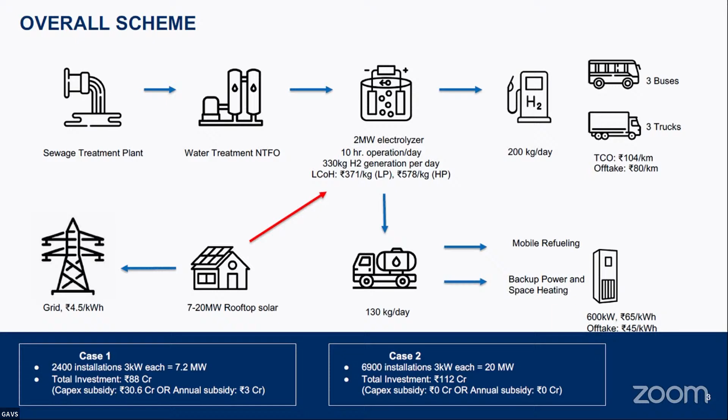So obviously the prices are a little high because of the nascency of the technology. However, even if there is a gap between the conventional cost and the cost from such kind of project, it would be paid through a subsidy. So for a capacity of 7 megawatt, a subsidy of 30 crore was required in terms of capex subsidy. But if you extend this to the entire Leh potential of having 6,900 households, then there won't be any subsidy required.

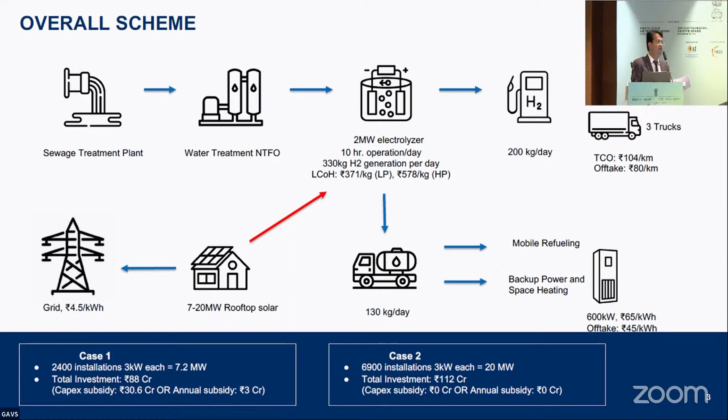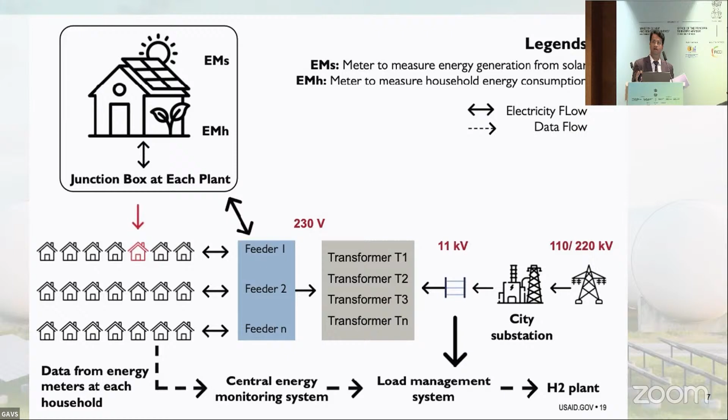So this model that we have created is to replicate in different cities. That would not only cater to the rooftop target of the country, but also take this project as a green hydrogen generation project for different cities and different users. You can see there are different households where we can have rooftop solar, and this rooftop solar can be centrally aggregated, and through a net metering agreement, we can actually generate hydrogen.

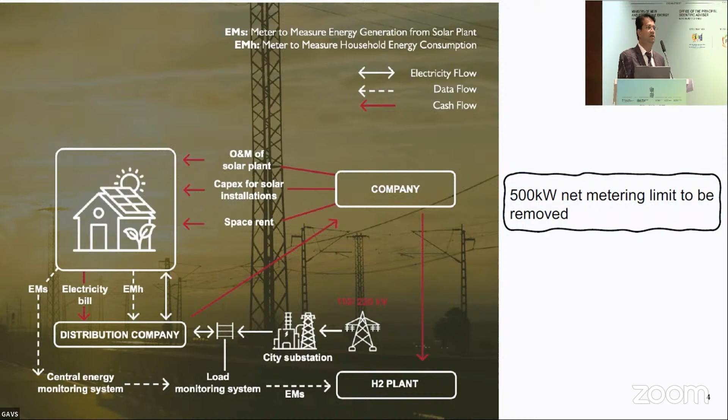And definitely for the cash flow, we would be paying the roof rent to the roof lenders, and we'll be getting money from the DISCOM in terms of excess generation that we have. And then the hydrogen that we produce can be utilized in buses and trucks, and also for backup power in the niche segment of hotels. So here we have also estimated what will be the cost, what will be the subsidy required, and if you want a graded subsidy, what rooftop targets we can take every year.

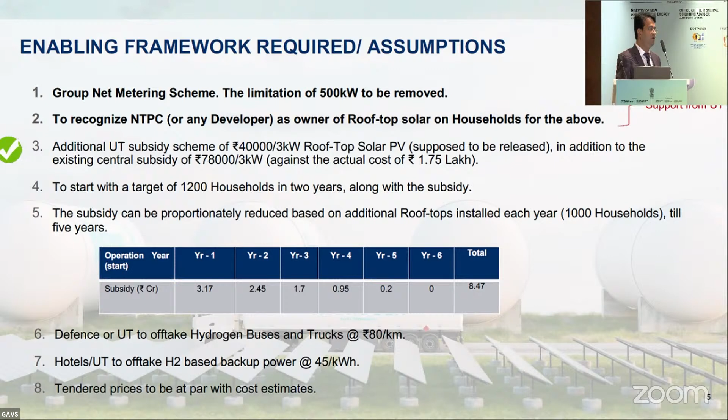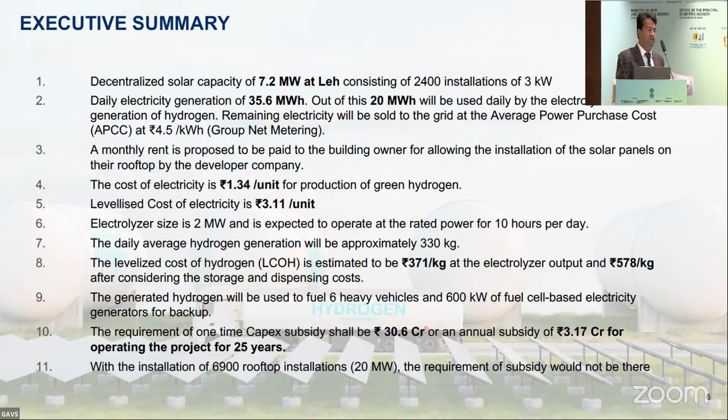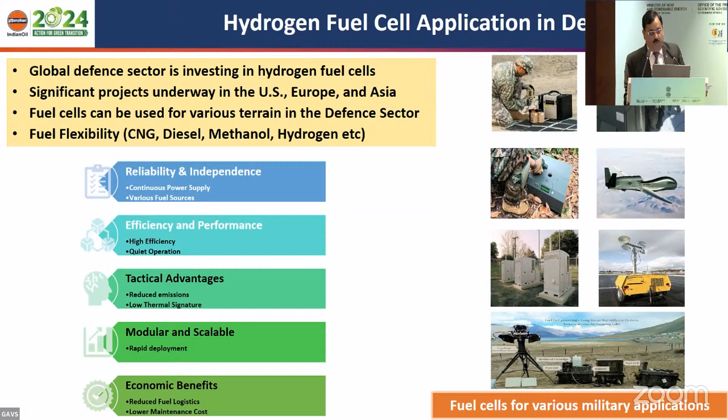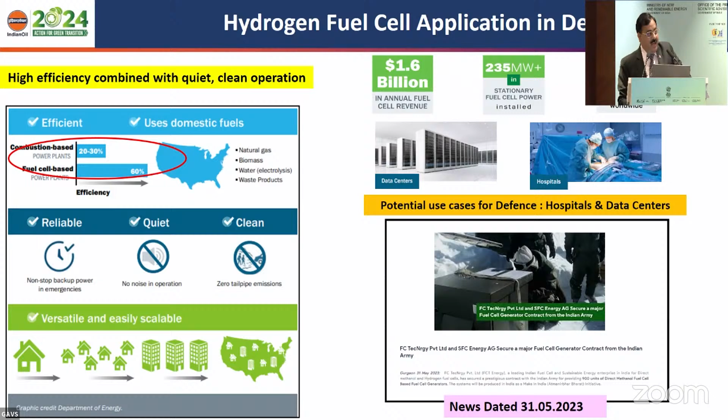Other applications, as I told you: reliability and independence, then efficiency and performance, and there are advantages like you can store energy, modular and scalable. So these are the benefits which I will say fuel cell and hydrogen have over battery applications. A lot of countries have already taken initiatives, and their defense forces are using hydrogen-based fuel cells for various applications.

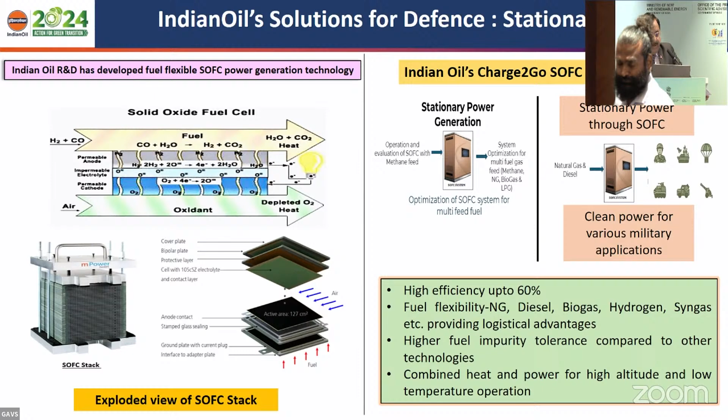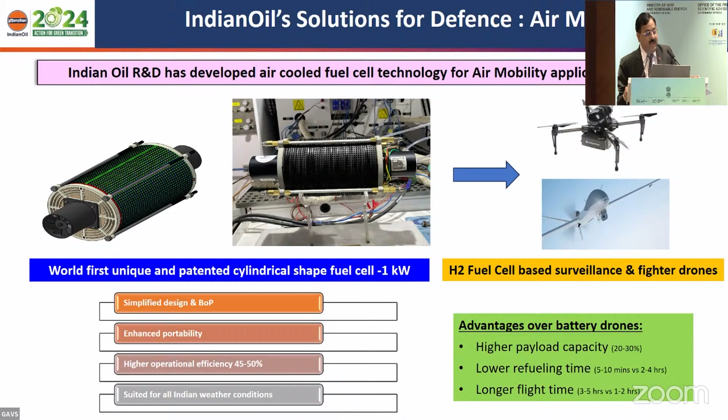At Indian Oil, we are also trying to develop the fuel cell for stationary application as well as mobility. We are trying to develop our own, because the buses I showed you are all imported. But now we are going for the development of the indigenous fuel cell. I think you will hear from other panelists also what they are doing in this sector. So this is a special fuel cell which we have developed for the mobility application. This is now patented. We have developed it at 1 kilowatt, and now we are going for the scale up.

We are also trying to develop a hydrogen based cooking solution, along with the hydrogen generator, for the defense application. So these are some of the projects. And just as a summary, I think we are trying to target all mobility, stationary, even air mobility, not right now, but slowly we will be coming into that also, and cooking applications.

So these are some of the initiatives which we have taken, and I think Indian Oil feels proud in partnering with the defense forces. So this is all from my side. I think we'll hear from the others, and then we'll go to the panel discussion. Thank you very much.

Thank you so much, Mr. Sharma, for setting the context for the day. And now, ladies and gentlemen, it's time to welcome our panelists who are going to present their work in brief, how hydrogen is undertaken in defense.

Our next speaker, ladies and gentlemen, holds a PhD in mechanical engineering from IISc Bangalore. He has been with Ashok Leyland for the past 20 years and has worked in engine research and development in the areas of diesel engine design, simulation, combustion development, performance and emission testing, as well as overall project management. He is involved in creating an alternate powertrain roadmap for future engine technology, which includes hydrogen and methanol economy. Please put your hands together and help me welcome Mr. S.K. Pandey, DGM-Engine Research and Development, Ashok Leyland. Very warm welcome, sir.

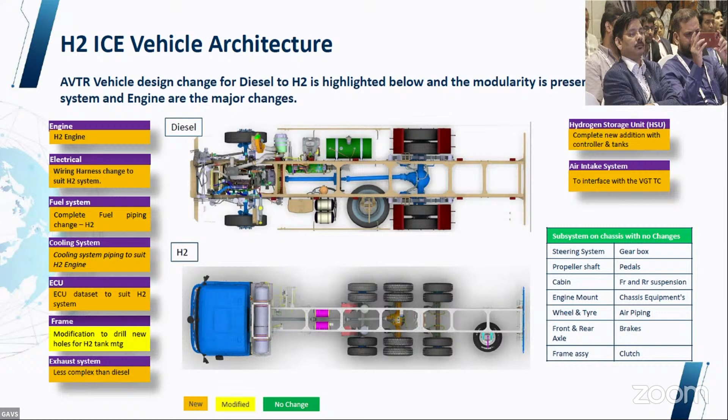So that's, in a sense, the architecture of the vehicle, which is not very different from what we have for diesel or a CNG architecture. So it's something which is actually doable with minimal changes.

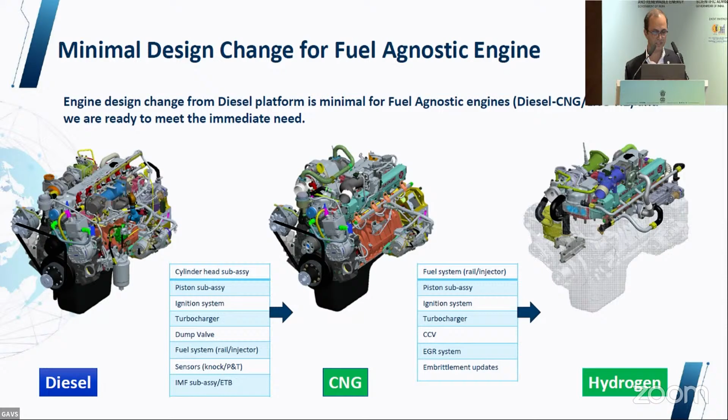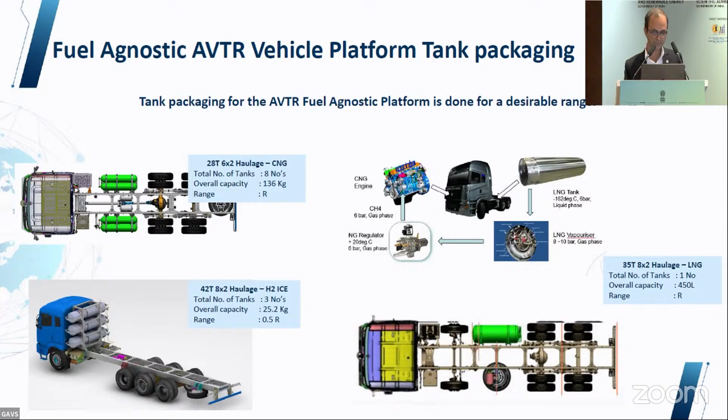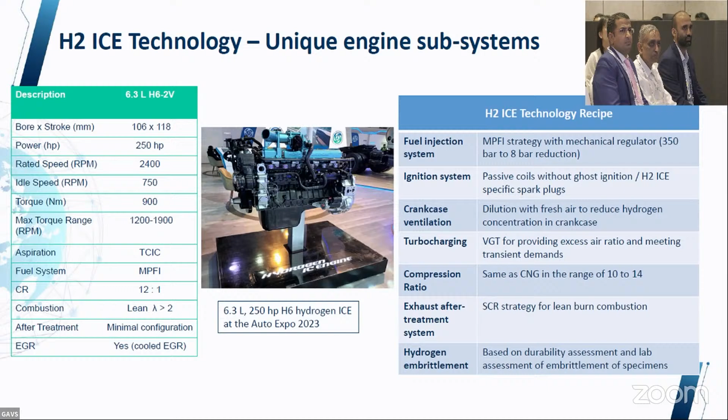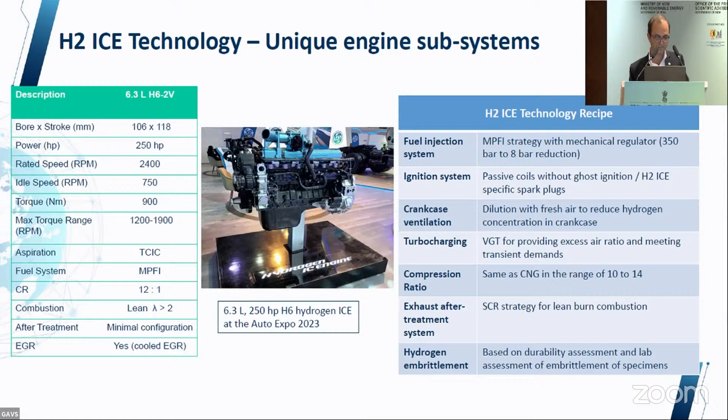The recipe is mentioned on the right-hand side on the table. Each of these unique subsystems, right from the fuel injection system, which is an MPFI strategy: we regulate 350 bar tank storage pressure down to 8 bar and use it in the rail. Ignition system, a passive coil without ghost ignition, that's very specific to hydrogen combustion. Crankcase ventilation requires dilution along with recirculation. Turbocharging is very specific to hydrogen and needs to be tailor-made for hydrogen. Compression ratios are something like CNG. We spoke about the after-treatment system, and there need to be hydrogen embrittlement updates too.

This is our journey in brief. We started with design a couple of years before. We are right now at a stage where we are working on detailed calibration and also starting the validation. Very shortly, we would actually start launching vehicles into the market.

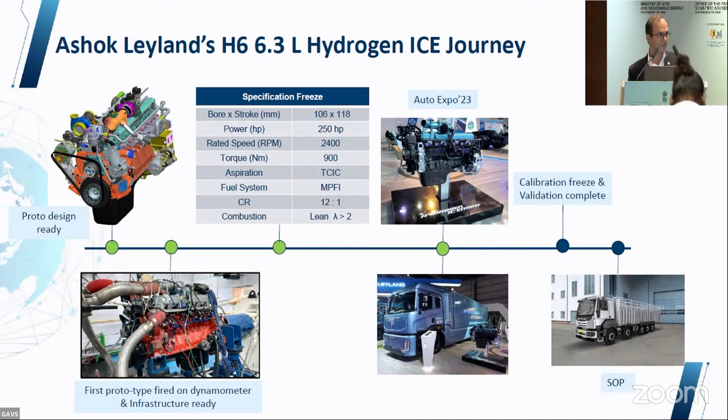This slide, most of you would be familiar. We have partnered with Reliance, and right now 23 vehicles with H2-ICE are running. They have gathered a lot of mileage, and in fact, one of them is being showcased in the expo as well. On the right-hand side is our flagship 42-ton haulage that we are working on right now. But it could be anything between 19 tons to 42 tons that this engine can cater to.

Very specific to this theme now, the H2-ICE for defense. So there are 4 different categories: armored vehicles, high mobility vehicles, specialist vehicles, and logistic vehicles. We see a clear visibility to get into the logistic vehicles with this class of engine. If we need to go to the armored vehicles, we would actually have to go to something like 320 horsepower. So that's doable. We have a roadmap that may take another 2 to 3 years of time frame.

The challenge in defense would be clearly altitude capability, because the moment you take the turbocharger matching to an altitude, it actually derates. So the altitude capability would be one thing which is very critical, and also the cold starting issues due to water content in H2-ICE would have to be addressed. So these are some solutions that are available, and we're working on that. So this is what I had to present.

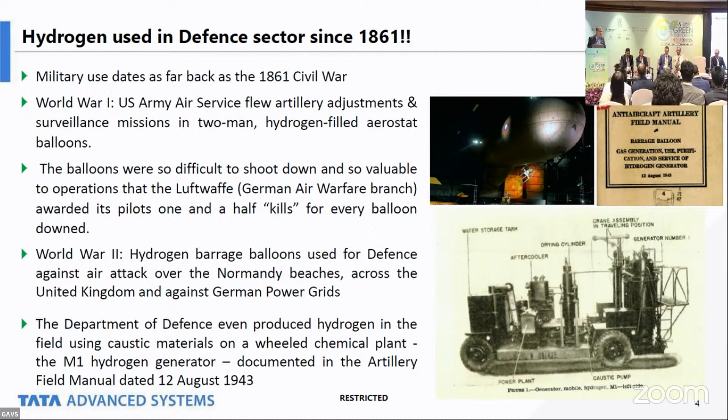UAVs have an endurance limitation using batteries. Our fuel cells are offering at least 3 times higher endurance as compared to a similar payload. Ground vehicles, what Mr. Pandey mentioned, there are a number of trucks, artillery vehicles, they all use auxiliary power units, which are basically diesel generators for generating the power. That's one area where fuel cells have been successfully tried.

A number of forward posts in the army, field hospitals, they all depend totally on diesel generators, 5 kilowatt, 10 kilowatt. Again, one of the highest segments of potential in the defense sector. We develop a lot of weapon systems, including artillery guns, launchers and all. All of them require a very important mode called a silent firing mode, where you want to make sure that the main engine is not running and you're not detected.

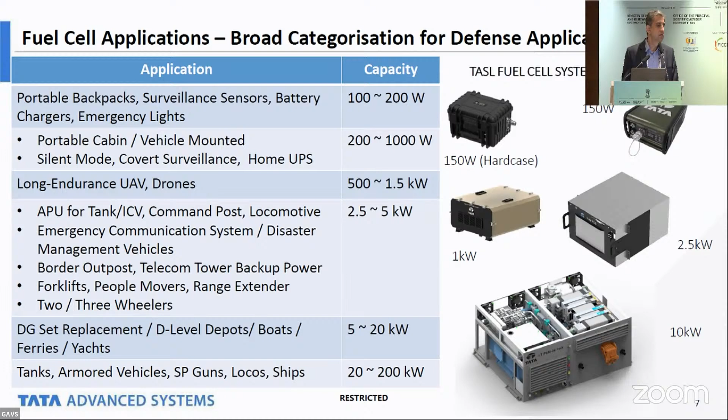And of course, the military mobility, where there are a number of vehicles using ICE engines, trucks, 4x4 trucks, armored tanks, which have a potential for the fuel cell system. Same thing if I just categorize in terms of power from top to bottom, starting at 100 to 200 watt, going up to 200 kilowatt per, say, any ICE engine or even a bus, what IOCL has supplied to the army.

All over the world, the other armies have invested heavily in hydrogen fuel cells. US has invested 62 million in hydrogen refueling infrastructure. Korean army has about 800 trucks, 800 armored vehicles, which are all using ICE, and they have already collaborated with Hyundai and Kia, and they are developing hydrogen engines for these platforms.

Another important contract which US awarded recently was $10 million for conformal hydrogen storage. As we know, right now, hydrogen storage is all in cylindrical way. But for UAVs and other platforms, you need them to be in a shape that is more optimal. So a special contract for 10 million was awarded to make such storage conformal, in the shape of the platform itself.

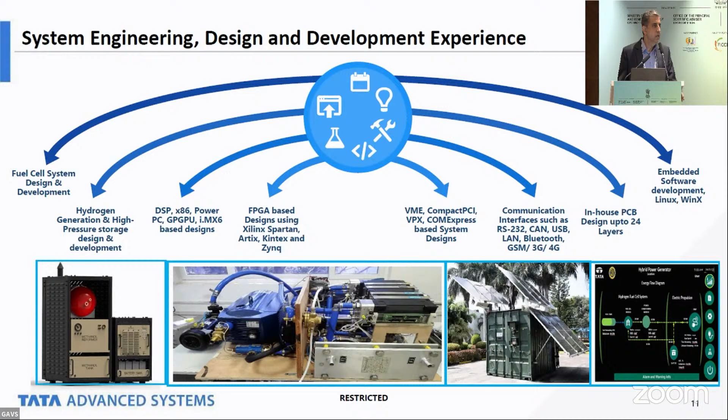A little description about what Tata has been doing for the last 8 to 10 years. For the last 40 years, Tata has been supplying weapon systems and tactical communication devices to the defense forces. Our DNA being R&D, we decided to start by developing the fuel cell systems indigenously in-house. So as you can see, right from the balance of plant, the PCB design, the complicated stack control strategy, the GUI, communication interfaces, the rugged packaging, everything. Today, we are not making the stack. I'll tell you the reasons for that also. But other than the stack, everything is made in-house by Tata Advanced Systems.

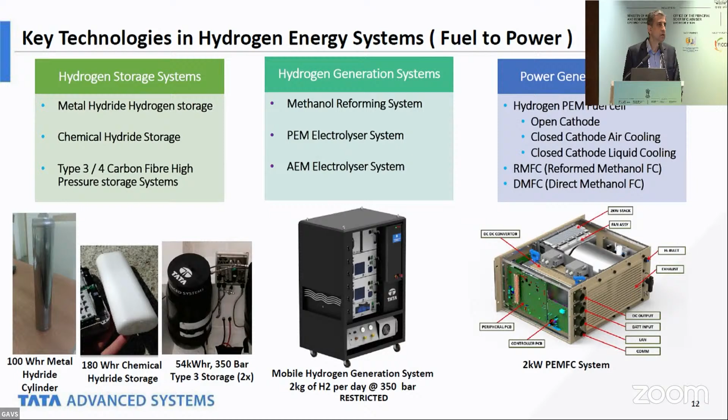So we started our journey. Our capabilities started with metal hydride, chemical hydride, and now with compressed hydrogen. We are developing a small compact hydrogen generator, which is about 2 kg of hydrogen per day. And on the fuel cell side, we have capabilities with open cathode, closed cathode air cooling, closed cathode liquid cooling. I'll show you the products which we have developed indigenously in the next slide.

These are some of the products, and for the defense sector, there is an important compliance requirement that they must be JSS 55555 compliant. They are very strict compliances in terms of temperature, shock, high altitude. Temperature is one of the most strict things where we have to ensure that the system works from minus 30 degrees to plus 55 degrees. And it has to start at that temperature.

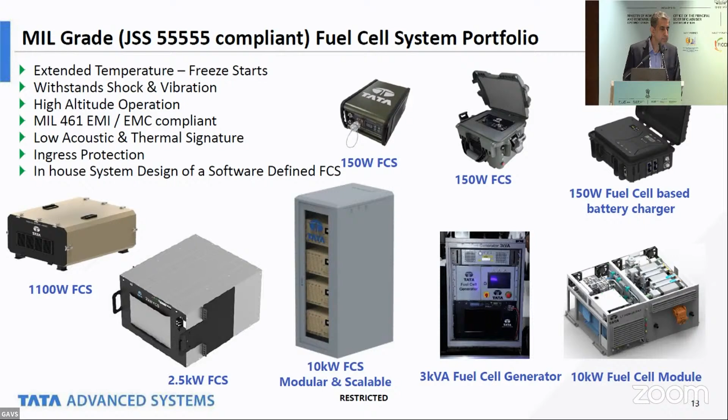So one typical test they do is they actually soak your system for 16 hours at minus 30 degrees and then tell you to switch it on, which is one of the toughest tests to perform on a fuel cell system. And the high altitude operation, which my colleague already mentioned. In UAVs, we have products which can demonstrate 3 times the endurance of a conventional LiPo battery for the same weight.

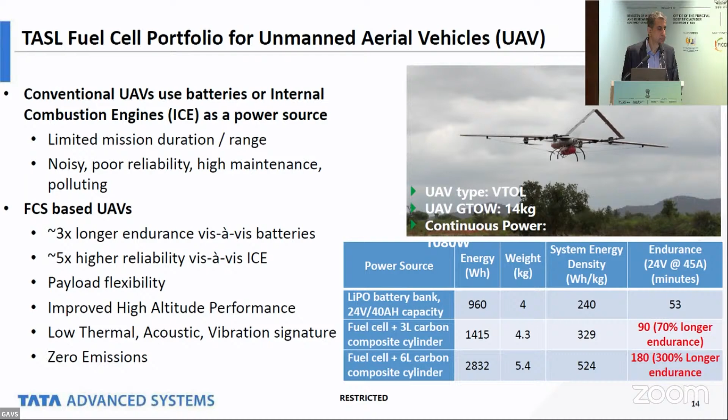And recently, we have become a technology partner for Mazagon Docks Limited, where a fuel cell ferry was launched. The fuel cell was again indigenously developed by our company, and it was launched by the DefSec in May 24. Compared to an equivalent electric ferry, which gives about 5 hours of endurance, our fuel cell gives 17 hours. And the filling time is just a few minutes as compared to almost 10 to 12 hours, which you have to charge a battery.

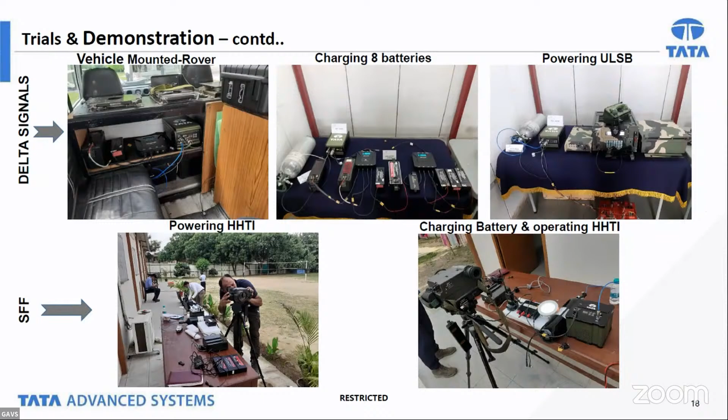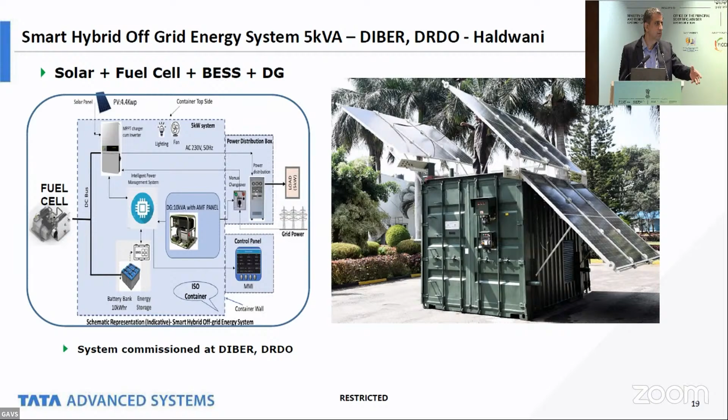We are among the first few companies who actually trialed a hydrogen fuel cell at 18,000 feet. So I'll move forward. So these are some of the pictures. We trialed them at 18,000, 6,000 and all. Again, some more pictures of our trials conducted. This system we recently commissioned at DRDO. It's a standalone microgrid using a fuel cell, solar, DG and a battery and an intelligent power management controller, which we have developed in-house. So we have proved beyond doubt that hydrogen fuel cell is the way to go for defense.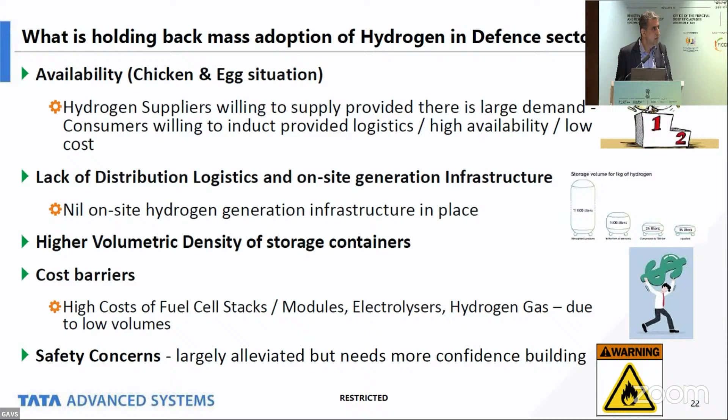Challenges faced. There is a chicken and egg situation. You know, there are 200 hydrogen suppliers and distributors all over India. They say, you show us the demand, we'll reach the hydrogen. The army says, you show us the hydrogen, we'll give you this. So we need to all come together and address that. Today on site, there is no on-site generation. NTPC has initiated the first one. Volumetric densities of cylinders is a little challenge, costs and safety. Most of them we have alleviated.

So these are some of our recommendations: we need a strong partnership between the stakeholders, that's the MOD, MNRE and the industry. IDDM and DCPP are important, that stands for Indigenous Design, Developed and Manufactured in India, and Development cum Production Partner. All of us will agree that we have spent a lot of investment in designing these products, and we need a similar commitment from the MOD for production orders. Today, we are willing to spend a lot of money to invest in a stack development or a fuel cell development, but we need those commitments in terms of volumes.

In terms of infrastructure, our recommendation is to first have hydrogen as a service. Install these tube trailers, cascades, and trailers at the site. In parallel, we develop the captive plant model, and the ultimate goal should be piped hydrogen to the forward. Thank you so much.

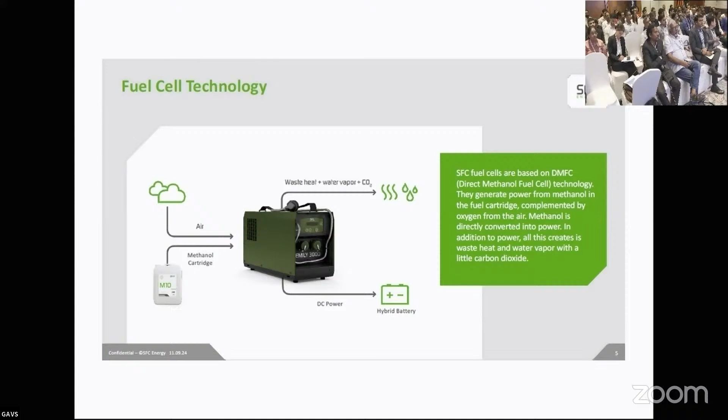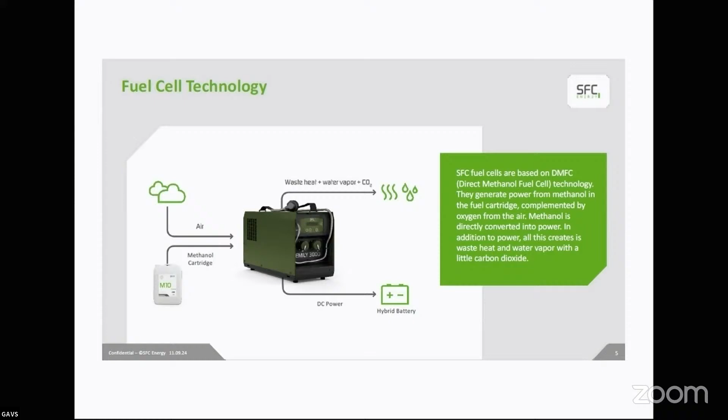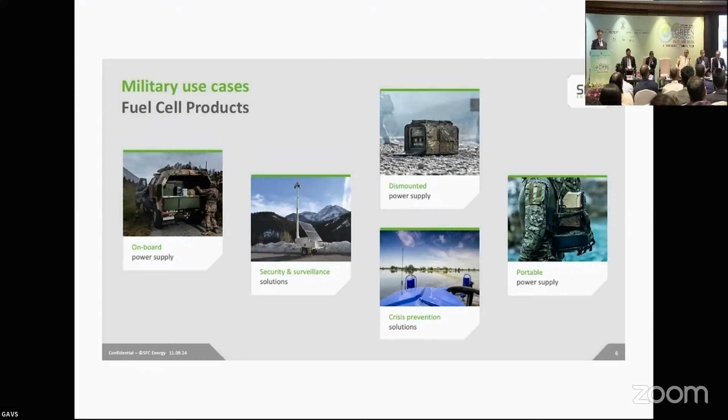What is also important to mention is a fuel cell generates DC power instead of AC that a generator usually does. And that allows us to hybridize seamlessly with batteries. And that has a huge effect on the overall efficiency that I'm going to point out in one of the following slides. Here you see the military use cases, also very similar to what we have seen before, from portable to onboard power supply to crisis prevention and also dismounted scenarios. I picked out two examples that I'm going into more detail. One is the crisis prevention and also the dismounted and camp size applications.

This here is an example where we did a study together with the Spanish Foreign Legion right before the COVID crisis happened, 2019. And this is a one-on-one comparison in a military camp. On the one side, using the generator that you see on the right side of the slide, a conventional generator far away from the camp because it's loud. The soldiers in this experiment were sleeping in the tents overnight over 3 days. And then you see the fuel cell being deployed next to the tent, a methanol fuel cell in this case with a hybridized battery bank.

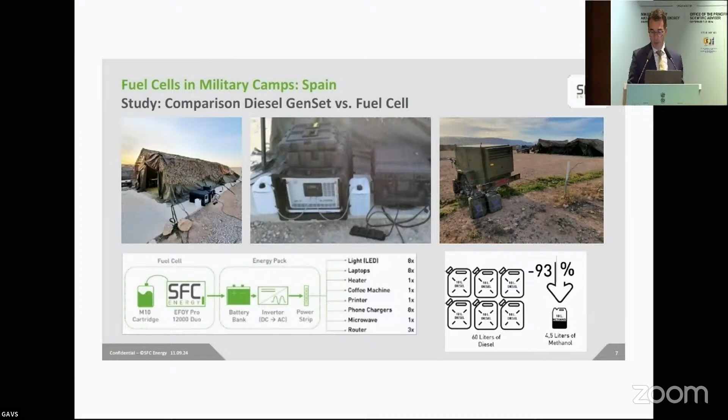And the key outcome of that study, this is really remarkable, is we used 60 liters of diesel on the conventional side and only 4.5 liters of methanol for the campsite using the fuel cell. And you see the applications that are in here. You have light, laptops, a heater, a coffee machine, a printer. So this is what you find in these tents. And that shows you the capabilities of fuel cells being used in the military environment. So it's a huge saving potential. And that also drives the efforts of the various armies around the world to replace diesel generators by modern fuel cell products and systems.

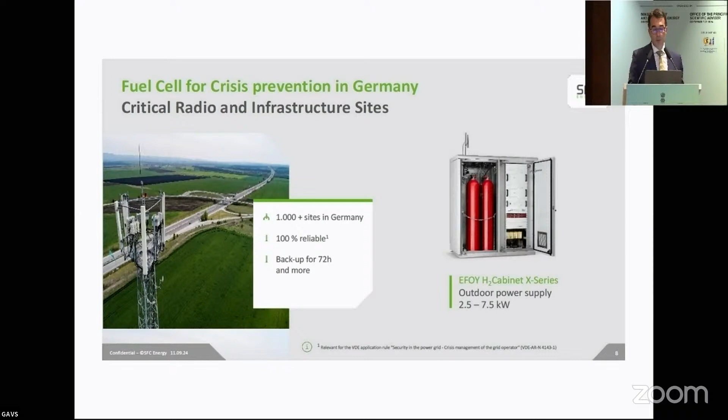The second one I'd like to point out is in Germany, crisis prevention. Germany is facing a lot of flooding, unfortunately, also due to global climate change. And the digital network of police, fire brigade, rescue services has a backup power from fuel cells. Over 1,000 of these sites have already been deployed. There are SFC products inside, as you can see on the cabinet on the right side, and it gives you reliability of uptime if the power breaks down nationwide for 72 hours, to allow rescue teams to do their job and to communicate, which is key in these situations. So these are examples where fuel cells are today used in significant amounts very successfully.

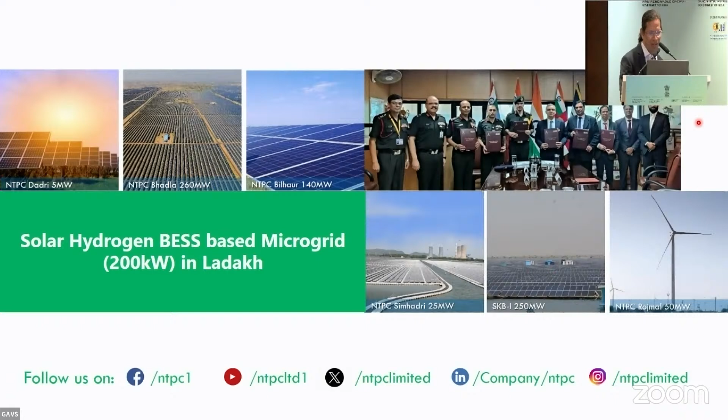Dear all, see this pic. Now I'm very excited to share with you all what we are trying to do with defense. Now this agreement was raised between NTPC and defense just to explore what is that we can do. Now NTPC is known for electricity and defense is known for what they do best. Now what best we can do? We came out with few proposals which I'll be detailing.

Essentially, what we're trying to do is to supply 200 kilowatt round the clock, day and night, without using any conventional source of energy. That's the scheme. And why it is required? Because army personnel are working at such a great height, high elevation, no grid, difficult to take diesel or kerosene or petrol to that location regularly. And coupled with that, the requirement of noiseless operation.

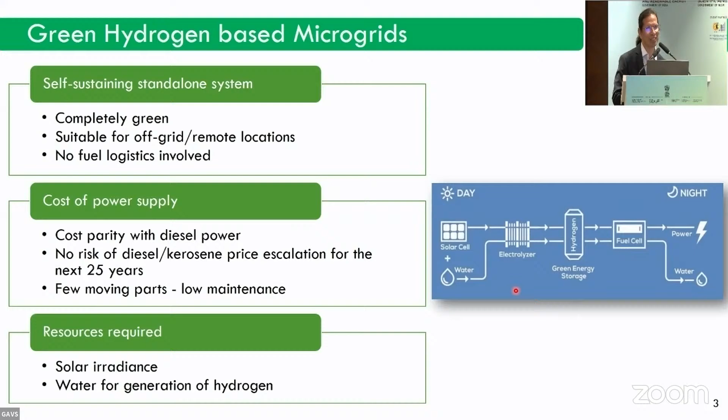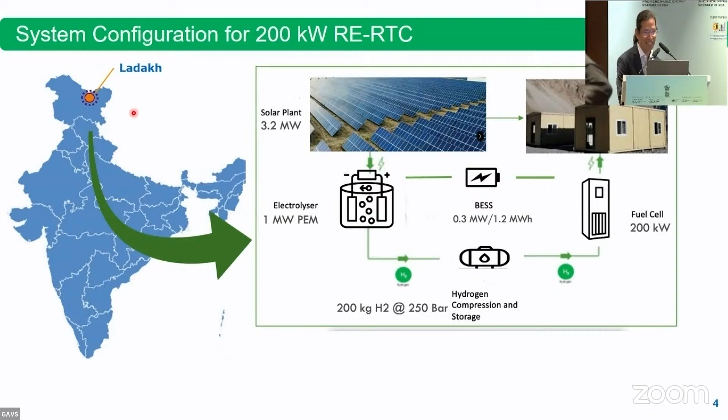Now, this is slightly difficult picture. Just see here. Now, essentially, what is showing here, that is the electrolyzer, there is a battery, and there is a fuel cell. Fortunately for us, when electrolyzer runs to make hydrogen, the other two components are not working. When the fuel cell is working in the night time, non-solar time, other systems are not working. Yet, I need to keep all of them at an elevated temperature so that whenever I need them, they are ready to fire. So that waste heat from the electrolyzer heats the other two during the daytime. During the night time, the waste heat from the fuel cell, which is quite high, heats up the other two, so that all are maintained at an elevated temperature all the time. That's the beauty of the system.

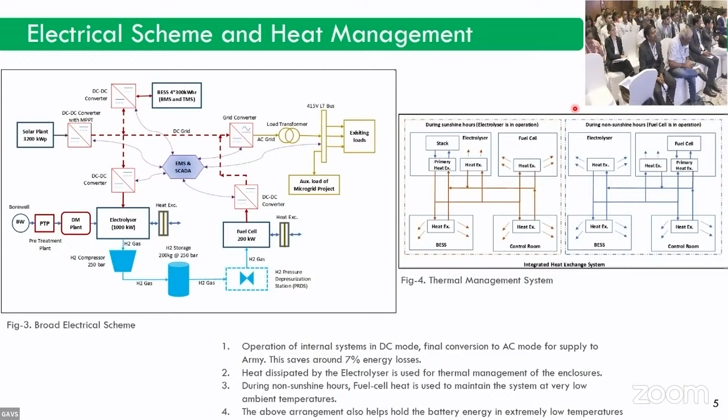And like previous speakers pointed out, the fuel cell gives direct current output, and so also the solar module. So just to save energy, we have some solution here. Essentially, for electrolyzer operation, we are taking the direct current from the solar modules so that we save energy on that.

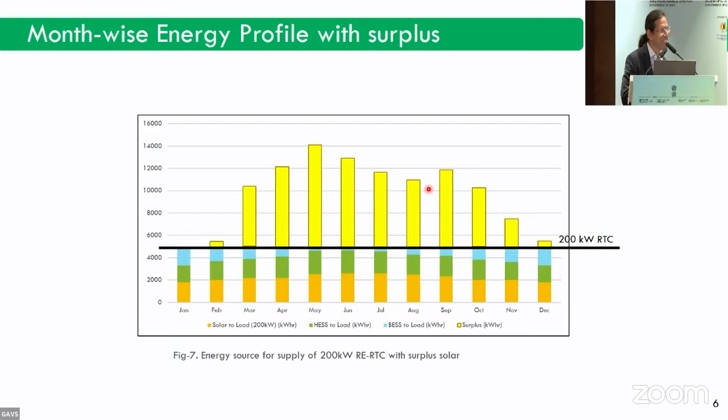Now, this is my last slide. You can imagine, simple to see and enjoy and appreciate. It's so difficult. Now, the difficulty level you can understand from this. So there are many components, and that is what NTPC is good at, to manage the complex projects, which are deep technical.